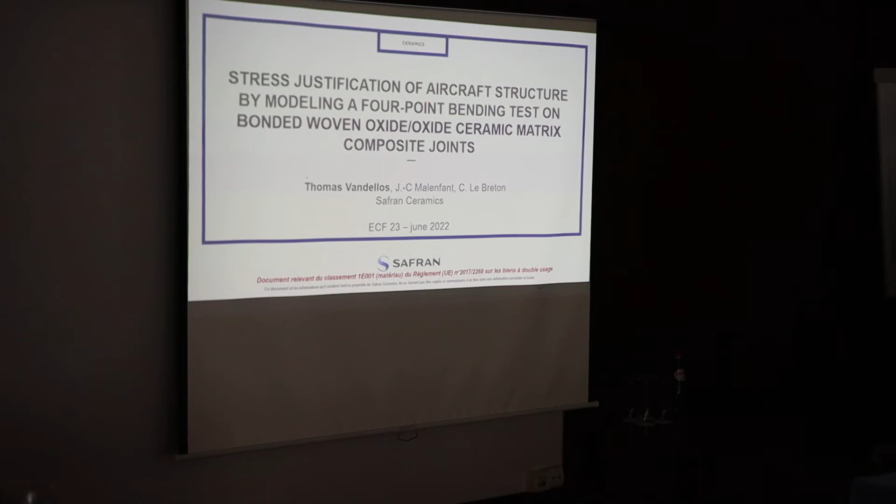Special topic TC06: fracture mechanics and fracture of advanced ceramics.

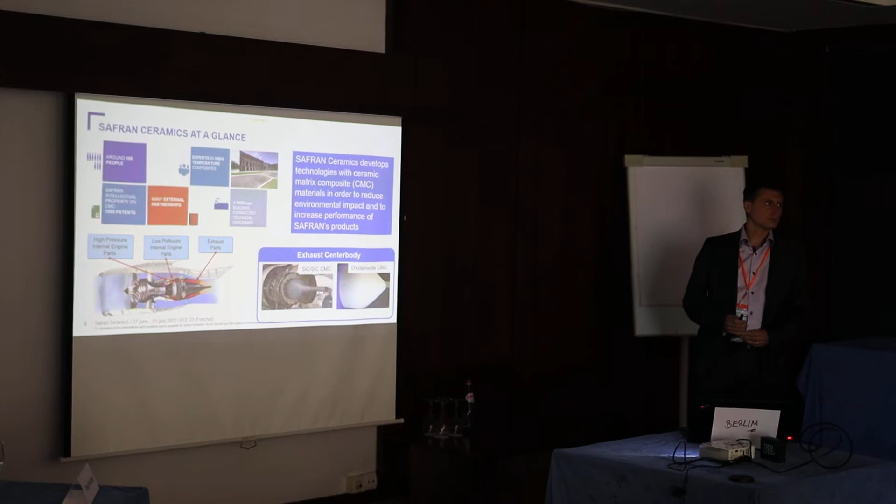Firstly, a few words about Safran Ceramics, which is a research platform of Safran Group. We develop technologies with ceramic matrix composite materials in order to reduce environmental impact and increase performance of Safran's products. Here we have some examples.

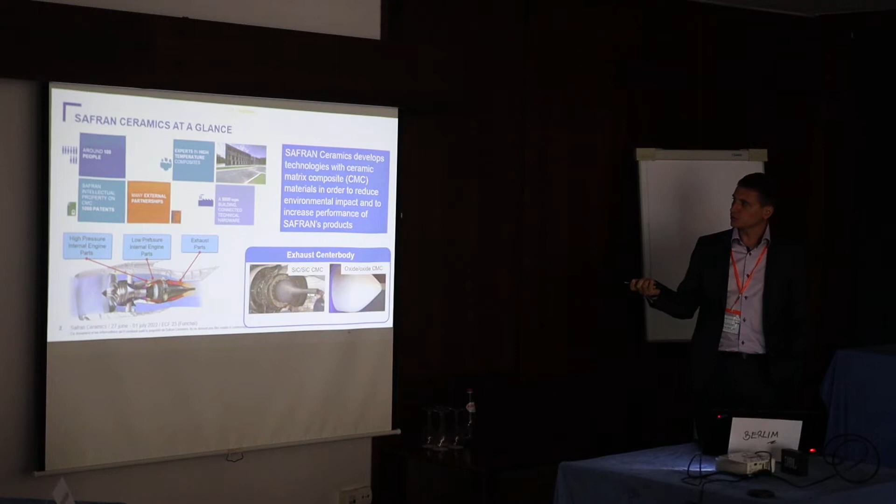We develop high pressure and low pressure internal engine parts and also exhaust parts. Here we have an example of an exhaust center body, with on the left silicon carbide CMC materials used for the exhaust structures, and on the right oxide CMC.

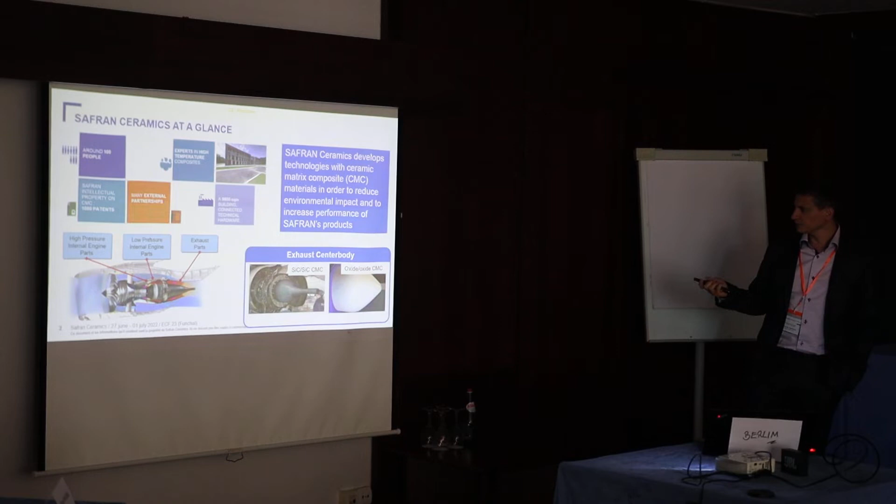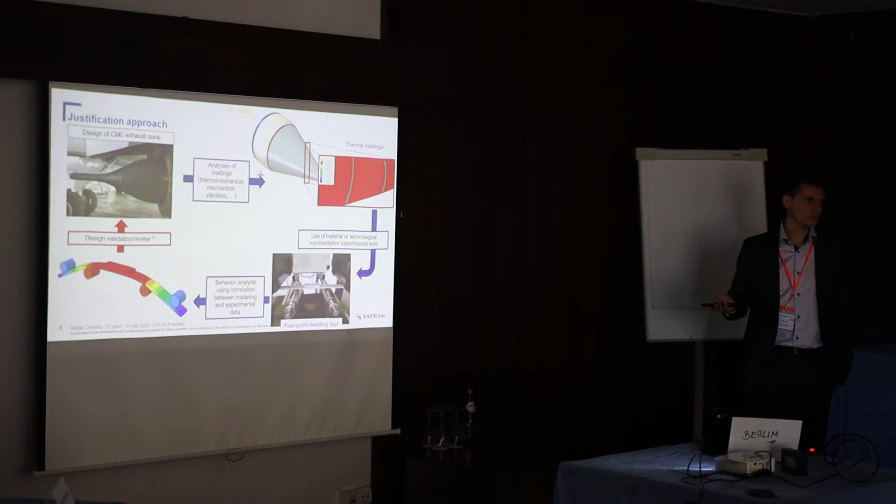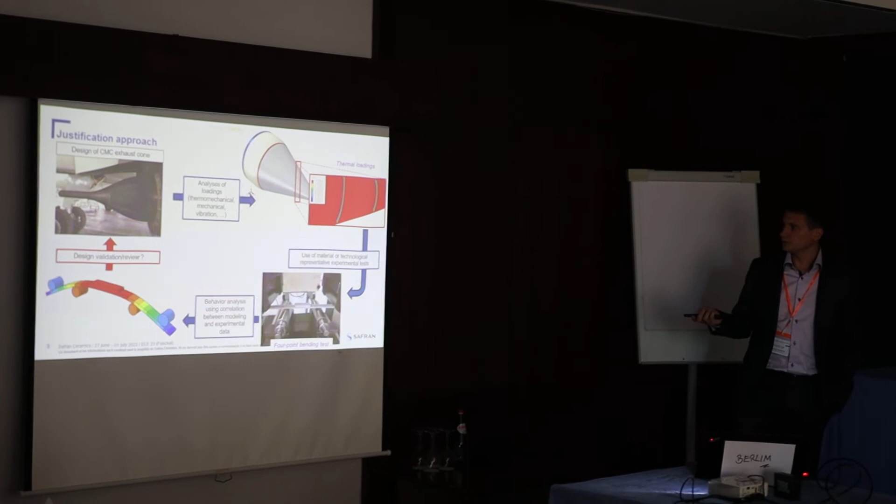We then define and use material and technological representative experimental tests to study the behavior of this kind of structure and also the damage mechanisms of materials. We use correlation with modeling to do that, and finally, using all these results, we are able to validate or review the design of the structure.

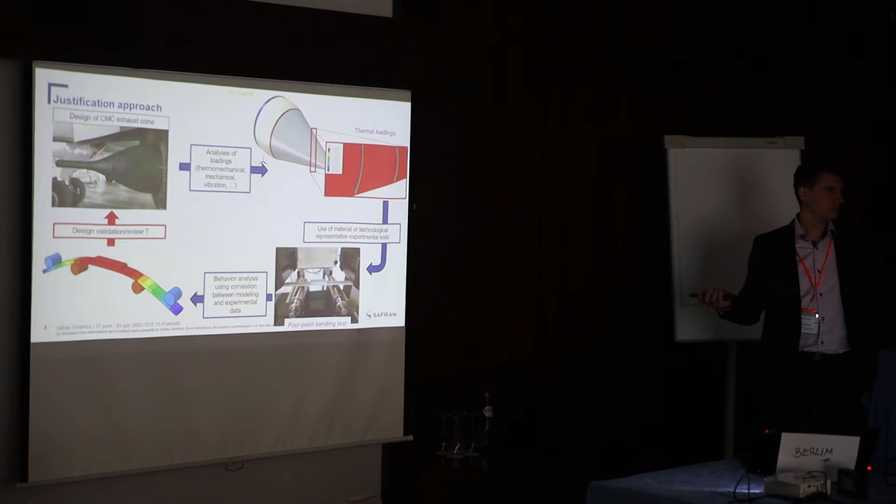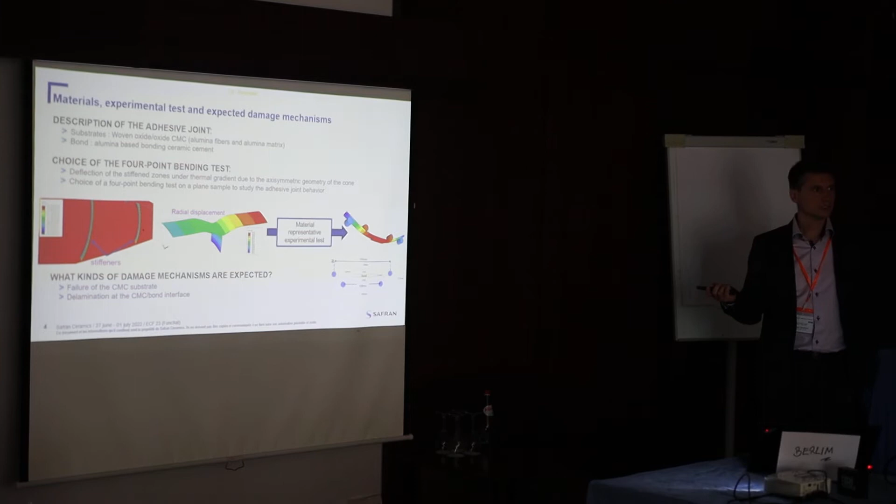In this presentation, we focus on the adhesive joint. For the substrates we use woven oxide-oxide CMC materials with alumina fibers and alumina matrix. For the bond, this is an alumina-based bonding ceramic cement.

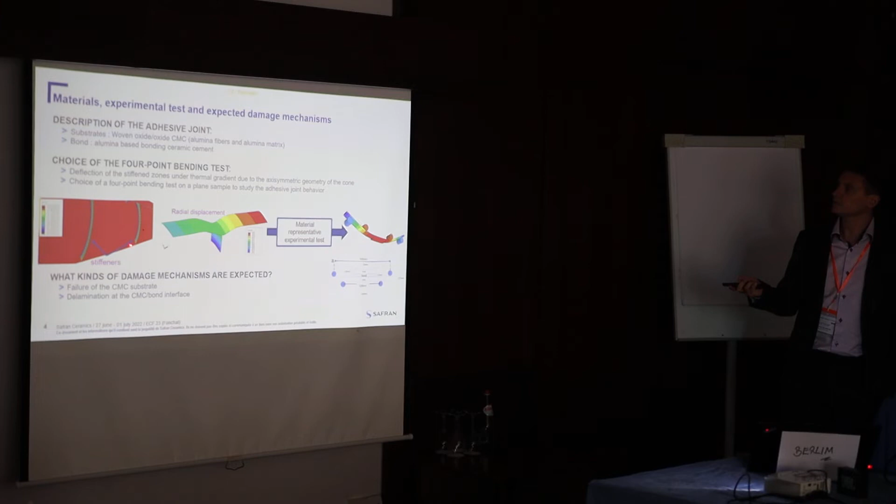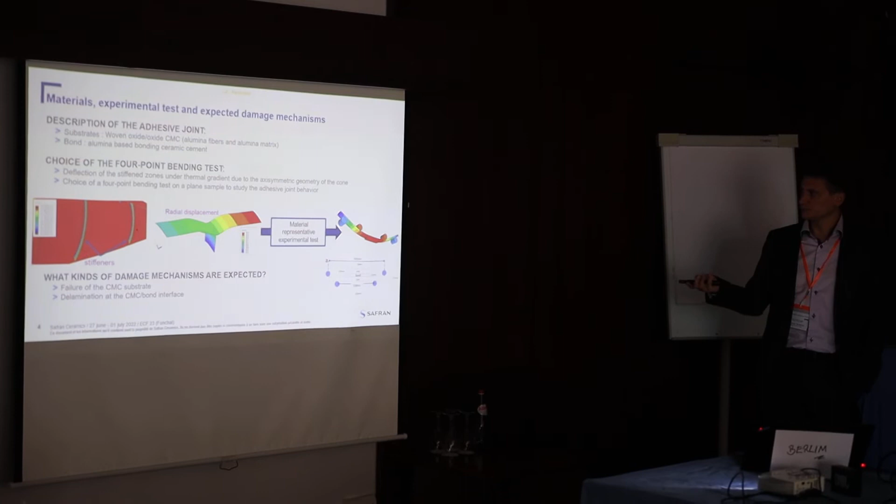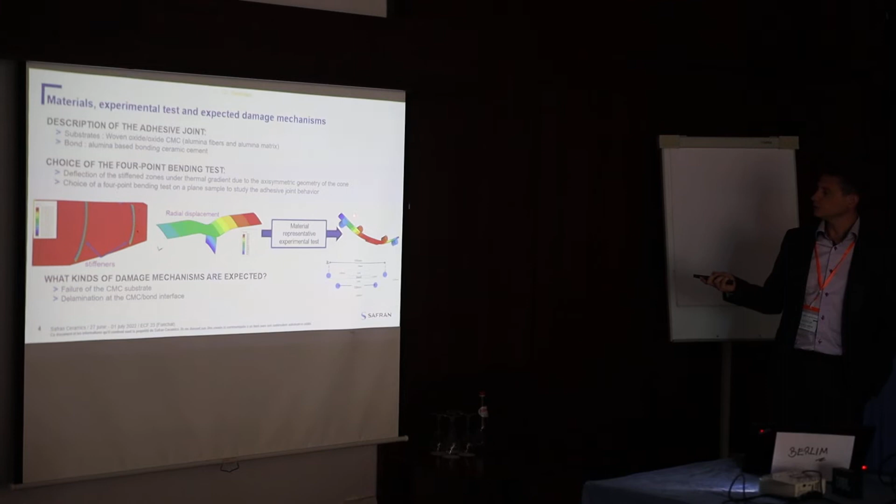Why did we choose a 4-point bending test? When we look at the deflection of the structure, the thermal gradients on the stiffened zones are due to the axisymmetric geometry of the cone. To understand the damage mechanisms of the material and justify the good strength of the structure, we can use a 4-point bending test as a material representative experimental test.

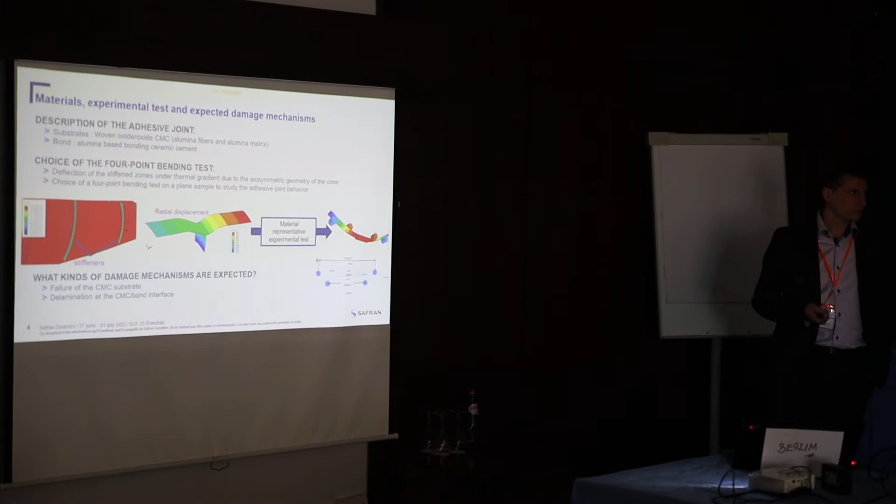So with this test, what kind of damage mechanisms are expected? We have two damage mechanisms: the first is failure of the CMC substrate, and the second is delamination at the CMC bond interface.

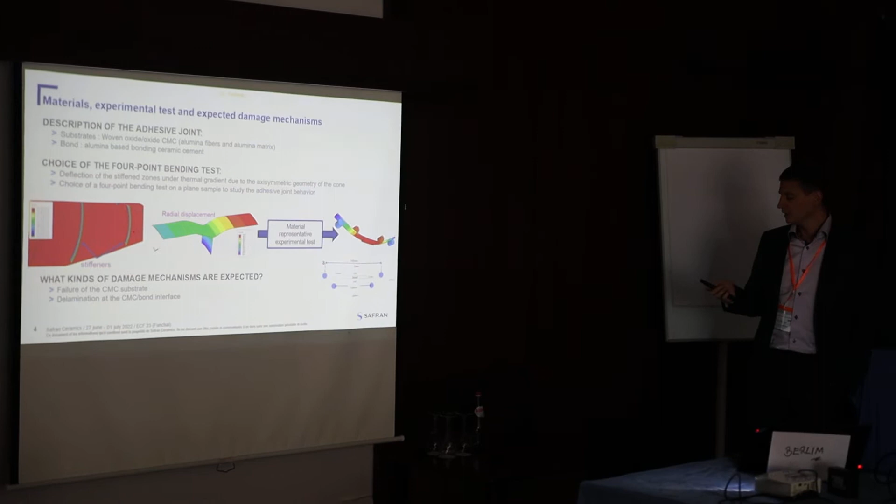We performed an experimental campaign. Here I show one example of a test. In the load-displacement curve we have 3 phases: the first is elastic behavior, then at 40 Newton we have the first nonlinearity, and finally a sudden drop in load.

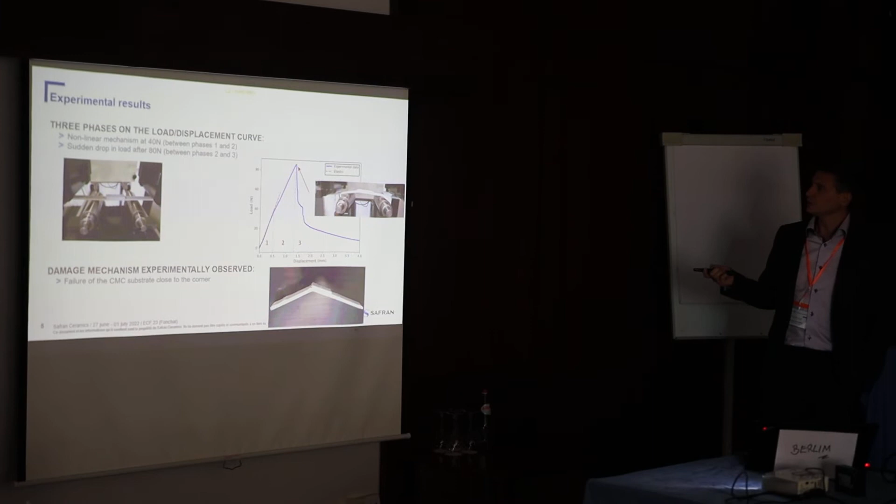When we look at the damage mechanism experimentally observed, we can see failure of the CMC substrate just close to the corner between the bond and the CMC, which explains the sudden drop in load. But if we use an elastic model to understand the first nonlinearity, we can't explain why we have this type of behavior.

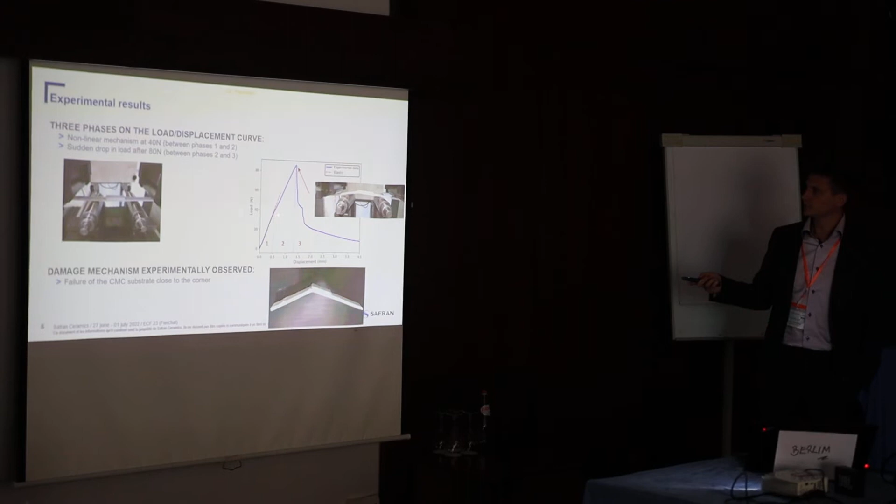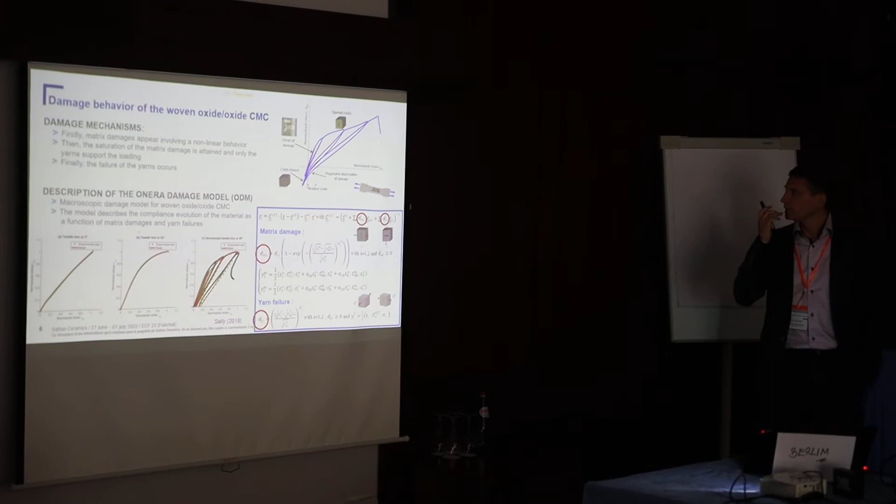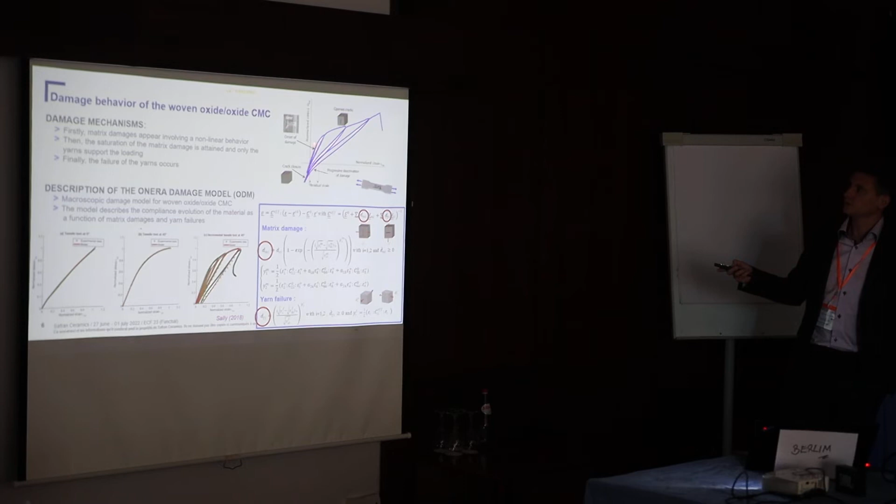So we need damage mechanisms of the CMC substrate, and this is what we have done. Here we have classical damage behavior of CMC materials under tensile test: firstly elastic behavior, then matrix damages appear, involving nonlinear behavior. Under tensile normalized strain, we get matrix damage, then saturation of this damage, after which only the yarns support the loading until they fail.

To model this kind of behavior, we use a macroscopic damage model for woven oxide CMC, the Onera damage model developed at Onera in France. This model describes the compliance evolution of the material as a function of matrix damages and yarn failures.

Here we can see identification of the model using experimental data under tensile tests with different orientations of the microstructure of the woven material. I don't have time to describe the whole model, but remember we have two damage carriers by microstructure orientation: DM for matrix damage and DF for yarn failure. These two scalars contribute to the compliance under strain.

So then we have added this kind of model on the simulation of the 4-point bending test. Not everywhere exactly, because due to the contact between the metallic roller and the substrate, and in order to make the calculation easy, we have just used elastic behavior there, but otherwise we have used ODM.

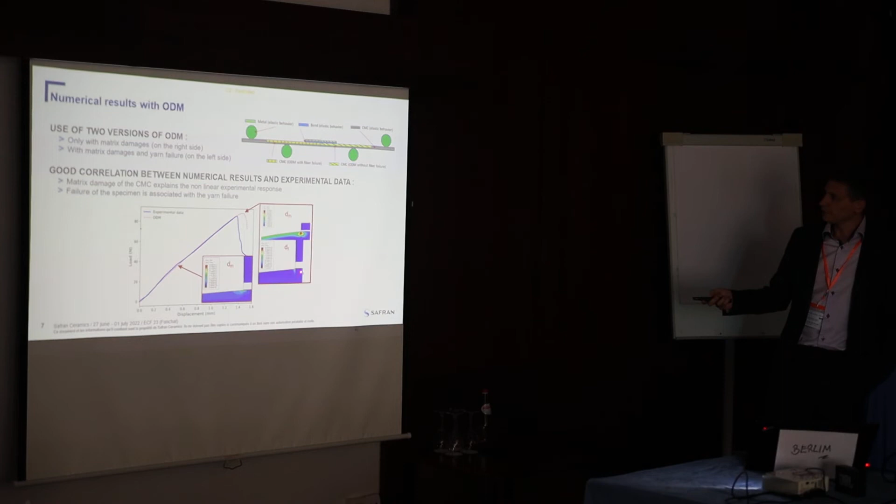So we have matrix damages here in the CMC substrate just under the corner with the bond. And also with this model we are able to describe the final failure of the sample. So at the end of phase 2 we have matrix damages, which is a larger zone of matrix damages, and also we have the yarn failure here just under the corner.

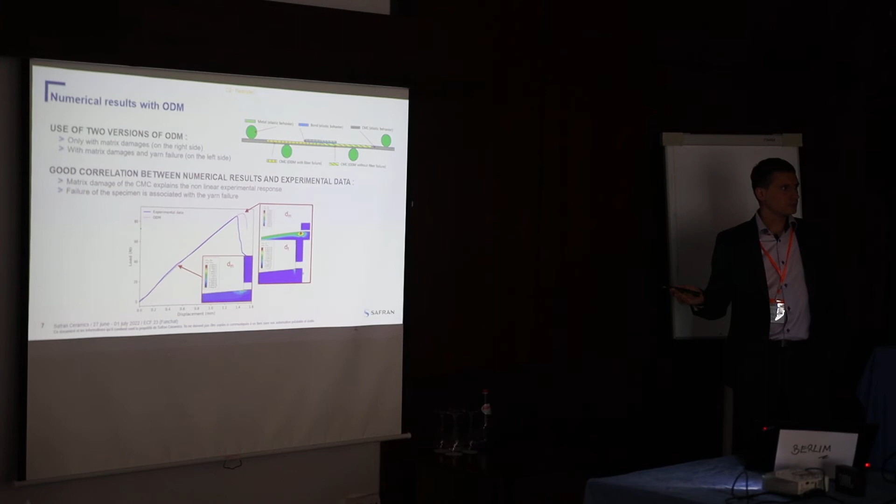So we are not able to predict exactly what we have done in the experimental test, but we are able to describe the phenomenon and the damage mechanisms. So we can be satisfied by this result, but not exactly, because we don't know why we don't have delamination before yarn failure.

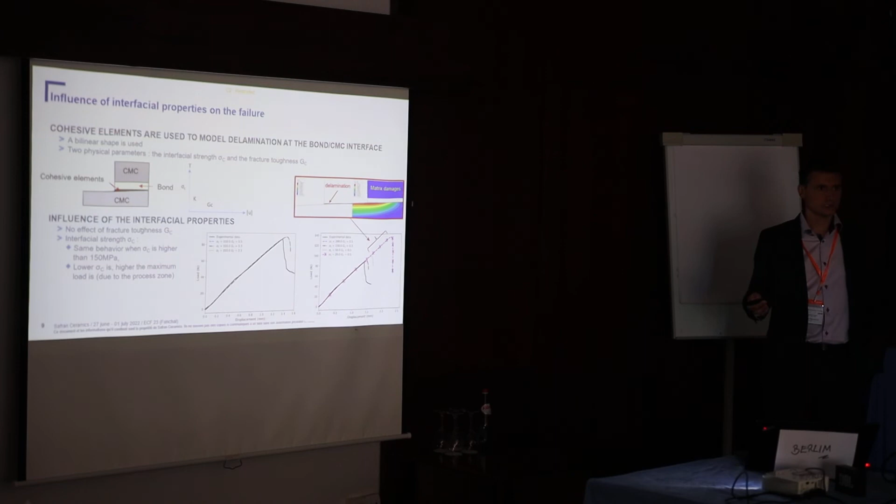The explanation of this kind of mechanism is due to the fact that when we use a low interfacial strength value in the cohesive zone model, we have a process zone which is larger. The process zone is the length where the cohesive zone elements are damaged but not already broken. So when this process zone is larger, we add softening behavior to the structure, and due to the softening, the stress into the CMC substrate is lower.

So we don't attain the threshold that we need to have yarn failure. This is why we have delamination for this value, and then the yarn failure of the CMC substrate.

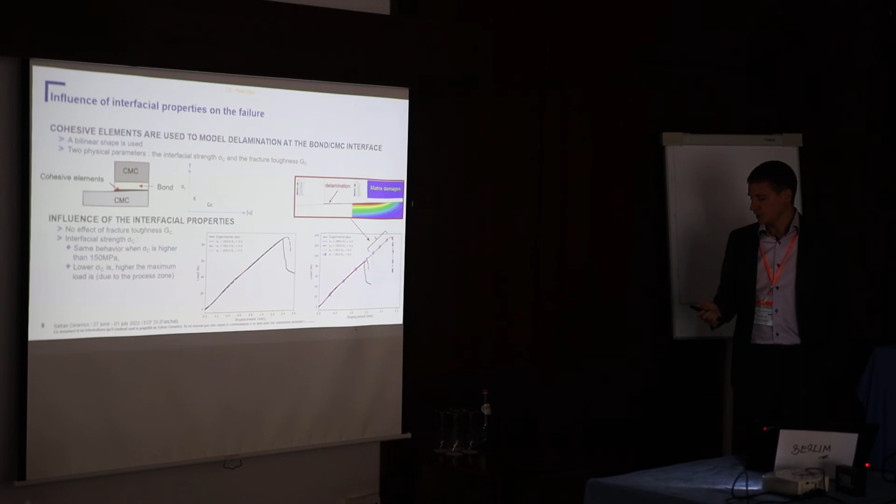So now we understand where we can have delamination and when we can have yarn failure. So we have not predicted, but we describe the different damage mechanisms with this kind of test.

So we can be satisfied because we have a good correlation between Onera damage model modeling and experimental data, and we have understood the strong influence of the interfacial strength on the macroscopic response.

But we cannot already use this kind of results to design the structure, because we have other problems. The first one is the influence of the geometry of the corner. We know that this is an important parameter on the damage mechanisms of adhesive joints. So can we study this influence using, for example, finite fracture mechanics as previously presented by Leguillon.

And also with other geometric specimens or other processes to manufacture this adhesive joint, we have changed the damage mechanisms, and we have only delamination between the bond and the CMC substrate. So we have other necessary studies to perform in order to next design the structures at Safran Ceramics.